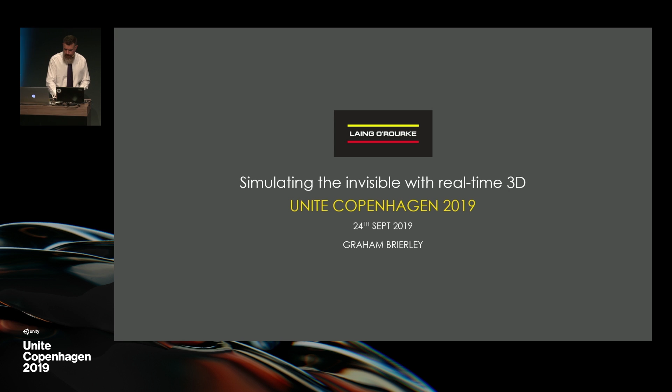This presentation is on how we've created a crane simulator using the Unity platform. I'm going to break this into three chunks - I won't spend too long on the first two, but they're important context: a little bit about the construction industry, how we at Laing O'Rourke are trying to challenge and change that, and then how our digital engineering team created the crane simulator using the Unity product.

It's a fairly well-known statistic that in the region of 90% of construction projects worldwide are either late or over budget. So the good news is there's plenty of opportunity for us to make improvements.

We don't have the best of images within construction, and you put that into the context of a number of the workforce and the experience that they hold leaving the industry, coupled with not being able to attract the same numbers into the industry against the backdrop of a changing environment.

We're going through a digital revolution. So not only do we not have a strong enough supply of the skills we require, we are fast learning that we need to introduce new skills. You'll hear people from within the sector talking about data analytics, developers, programmers, and data scientists that we are looking to introduce to the industry in order to help us with respect to productivity.

There are many reports dating back as early as the mid-90s from Latham and Egan around where construction could make some vast improvements. More recently, the Mark Farmer review, with the slightly drastic title of Modernise or Die, points out some of these key areas of opportunity.

So we have low productivity rates, a great deal of fragmentation over the design and supply chain, low margins, high risk, and quite frankly, a lack of collaboration and improvement as a whole.

I've spoken about the poor industry. You put all of this together, and it's quite an interesting, challenging time for us. And it's nothing that we don't know either - these are well-documented and well-known facts. The question we ask ourselves is then, what are we prepared to do about it?

At Laing O'Rourke, we've been investing quite heavily around how we might just challenge and change both ourselves and the projects within which we work.

There's a quick note from our chief executive and owner. We work for one individual, Ray O'Rourke. We are the largest privately owned construction company within the UK. It's about 3 billion turnover, somewhere in the region of about 4,000 employees, and we have our own direct labour force. We have a strong reputation around innovation.

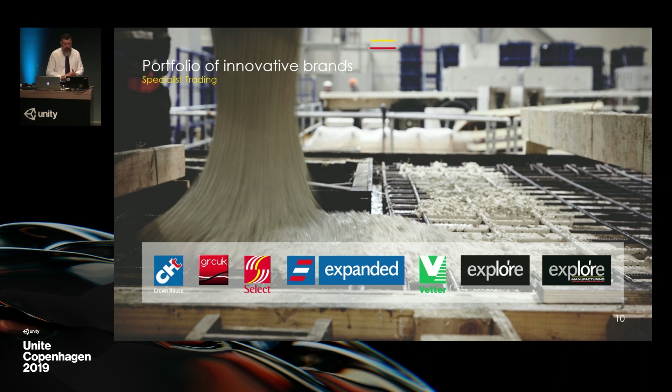So these brands include Crown House Technologies for our MEP installations, Select is our in-house hire - that's all cranes, cabins, lifting equipment - and then to the far right-hand side, Explore Manufacturing. I'm going to spend a moment there because that's quite key to our design for manufacturing assembly approach.

Out of this factory - this was a £100 million investment that came from Ray O'Rourke himself, built 10 years ago - largely this has been created around a product set, just across the bottom of the screen there. We are looking to create that kit of parts, influence the design, and then use those in the way that we go to work and construct our projects.

I've got a 2-minute video here just to give you an insight into that very facility.

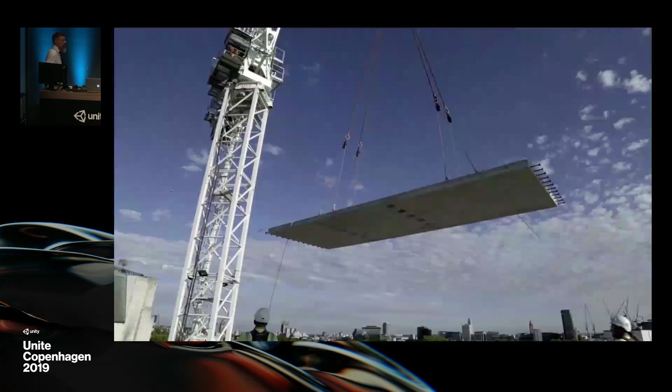Hopefully you'll get a sense from that video there of the investment that our owner's prepared to put into going to work differently and the scale of that facility.

There's a couple of slides here I'm going to use just to help me articulate a little bit about some of the key enablers, and then we'll move on to the consequences of this kind of change of approach.

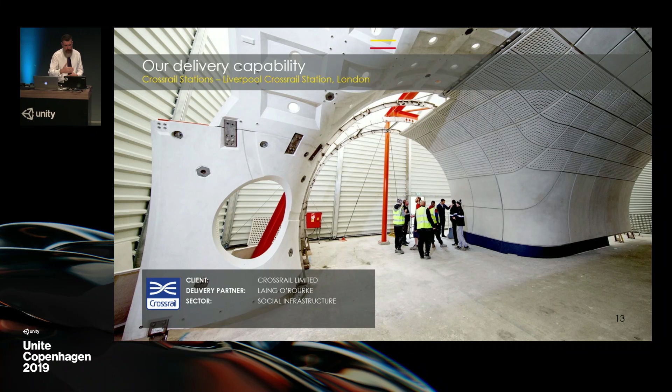So these are all from a manufacturing approach, right? All the gains in quality you get by working in a factory environment, you want to make sure that when you get these to site, they fit. So the last thing we want to be doing is unpicking all of our hard work. And that's true of those larger components that are supporting the slightly smaller platform finishes there.

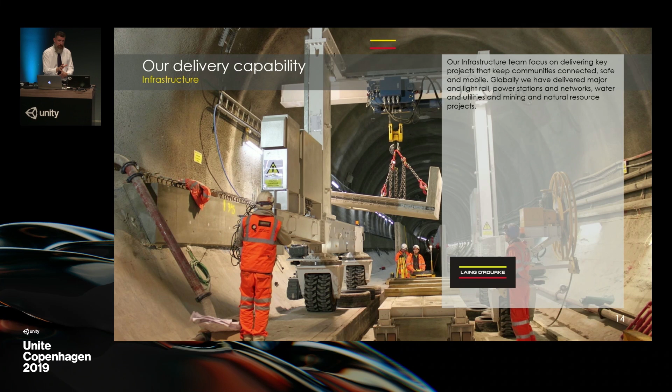Again, this is Crossrail, and you'll see here, and it's repeated in the video shortly, the component set that we then take into the structure that will support those platforms. So as users of such a rail system, we won't see this, but there's the large tunnel, and you can see there the small team of operatives putting into place the structure that will hold the platforms.

And rather than installing these bits of steelwork piecemeal and doing various follow-on trades, what we're doing is we have got these manufactured, sprayed, and then they are transported to site. And then everything then starts to come down to hook time in the lift. And so we do as few tasks on site as we can by moving the work and therefore increasing the quality by taking things into a more controlled factory environment.

I just want to point out two things. So the key enablers are being able to influence the design early, because you're now taking a product-led design approach and spending a specific amount of time on the detailed design such that the geometric fit is what we expect when we get to site, and that we're not unpicking the hard work that's gone into the manufacturing side of things. The consequence of working this way is that we now spend a lot more time focusing on the methodology. So not only have we got to be able to get these components into place in their finished state, but we have to be able to navigate these around a changing construction environment.

And this puts an awful lot more thought process and critical path, if you like, on the lifting and the manoeuvring of these products. So there's a short clip here, and I'll just ask you to consider some of the movement of these component parts.

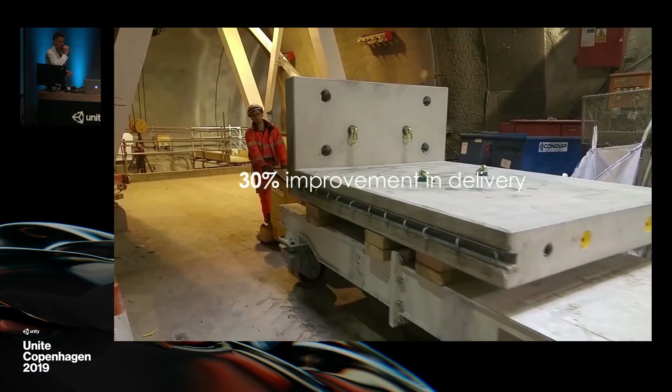So as you can see, a far greater focus on the movement of those component parts, and hopefully you've got a sense of scale as to how some of those look.

So I mentioned I'm the head of digital engineering at Laing O'Rourke, and in a way, in order to try and increase some productivity around our projects, we look to digitally prototype as much of our projects as we possibly can prior to building them in reality. And we do this through a number of ways.

The team that I lead is focused predominantly across three areas. So we spend a considerable amount of time trying to secure work, and we focus on de-risking and understanding the complexities of the projects at this point. So we'll do some work around visualization, methodology, and quantification.

Once we secure a project and we go into delivery, we have a team that focus on something called Level 2 BIM, which you may or may not be familiar with, and some of the other presentations have spoken about BIM, Building Information Modelling. This is responding to government and/or client requirements, setting up an environment on a project whereby we can collaboratively work in a 3D environment with our design and supply chain, and look to utilize some of these models for other use cases.

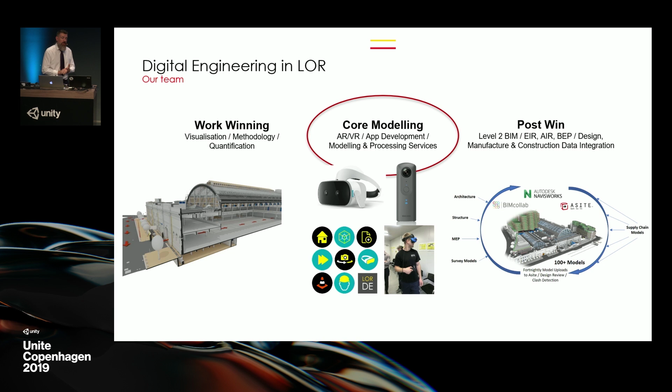We have a team that kind of sits between the two, a central modelling team, and I'm going to focus on this team because this is where we get to the crux of the presentation. We have used various different bits of software for a number of different applications over the years. I'm going to focus on augmented virtual reality and the use of Unity.

It's probably worth pointing out that around about 2008, we got our first bit of antiquated kit that looked like a small keyboard and a camera held together with gaffer tape, but it sort of worked for us. You'll see prior to 2015, there's a smaller number of use cases, many of which were less successful than others, and I've got no issues with that. I'm quite happy to fail fast as long as we continue to learn about what it is that we're trying to achieve and where the application might be.

Against that timeline, I'm going to focus upon the crane simulator and how that's been taken into our lifting academy.

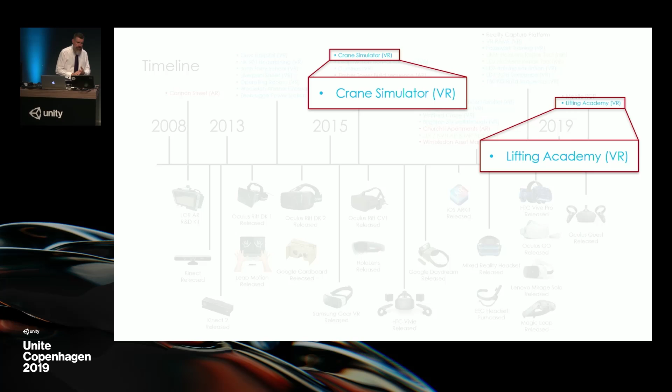There's a key point I want to raise here, and it comes back to that skills report I mentioned at the start. We added Derek and Grant to our team post-2015. They took a bit of a gamble on us as developers, not familiar with the construction industry, and I certainly didn't ask permission when recruiting these individuals, but they've been very fundamental and valuable team members since, bringing a skill set we were otherwise struggling with.

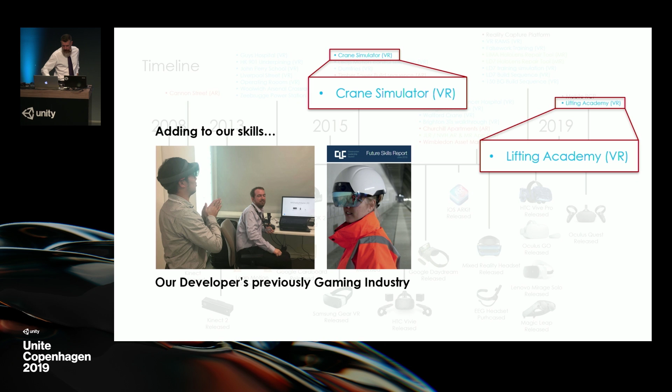As engineers and technicians, certainly my generation, we don't necessarily have a developing, coding and data background built into us. It just wasn't part of our training. I think the guys here are praying to the modelling gods that Reflect will stop them spending all their time optimising models. They assure me that's 60% of their time, so I'm looking forward to some productivity gains myself when that software becomes available.

What's key with any kind of application is that you understand the scope. The scope here is that we have a crane operator working in isolation. We'll have another member of the lifting team, usually out of sight, hooking a load, and then someone else on the project somewhere, perhaps in sight, perhaps not, unhooking the load, ready to put that into position. This team can look different from one project to another, so bear in mind those components I showed you in the videos earlier.

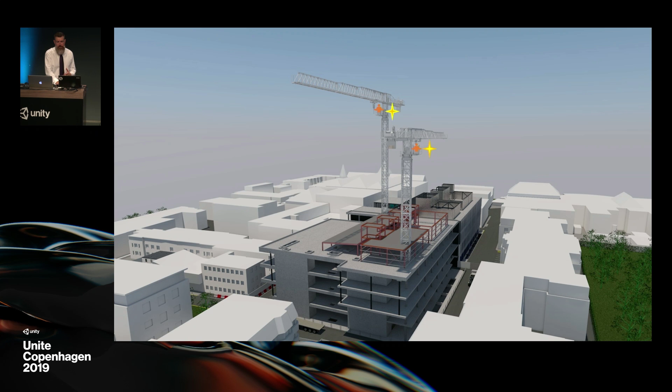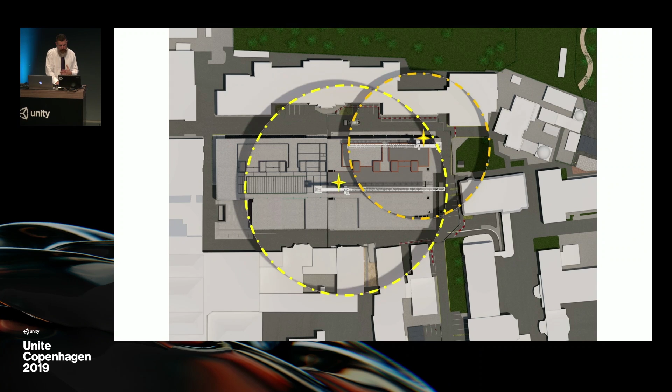If we put that into context of a project, you'll quite often find there's more than one crane at a time, and the communication between these drivers is fundamentally key, as shown by the fact that in plan here, they will oversail. In addition to communicating with each other and doing concurrent activities, this is how that lifting team might look on a project.

Down at ground level there, you'll see the back of the wagon, and we'll have an individual from the lifting team hooking the component, not necessarily being able to see the individual who's going to be in receipt of that component.

It's not always that the individual in receipt of the component will be in the field of vision of the crane operator. On one or two of those videos earlier, you saw us dropping some large components through a mole hole, so the methodology would have allowed for us to drop those components. The communication is all verbal, and it's fundamental that this team understand the constraints and perspectives from each other so that this is done safely.

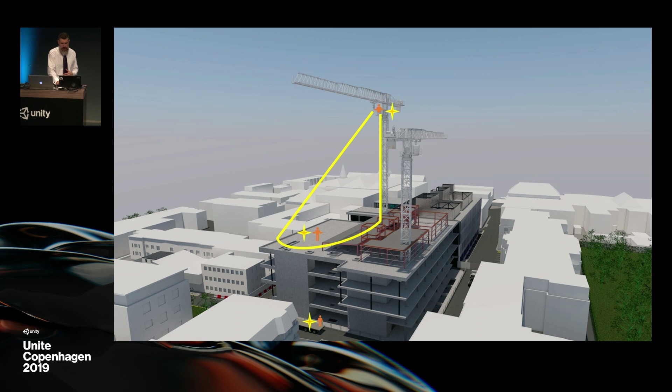The higher those floors are, the greater that distance and the harder it's going to be to see. You certainly can't see beyond the edge of that slab in order to see where the lift was being hooked in the first place. So fundamentally, we're talking about blind lifts here, and the communication is so important.

You might also notice this is a relatively quiet and clean-looking site. That's another one of the advantages from a design for manufacturing and assembly approach - we managed to reduce the number of workforce on site by focusing on these key operations.

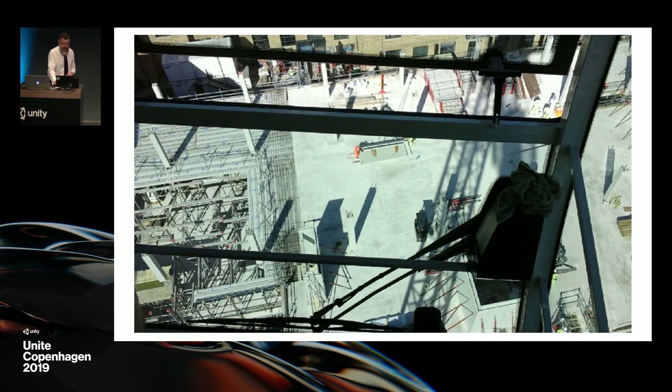If we go back to the context of the team, the crane simulator started with some development around the crane operative's perspective first. There's a short video here where Grant, one of our team members, is going to do a bit of narration around how this came to begin.

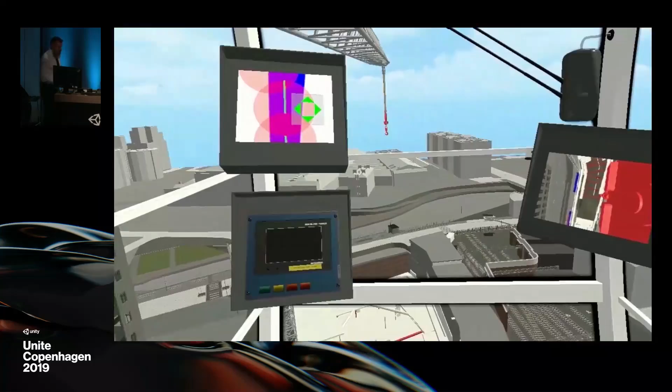I'm not from a construction background, I'm a programmer. I've come from a completely different background, and I was brought into the company to develop applications like the one for the Google headquarters. We've made a crane simulator, inspection modules for health and safety, training applications, that sort of thing - it's to immerse people in the environment before they go there, really.

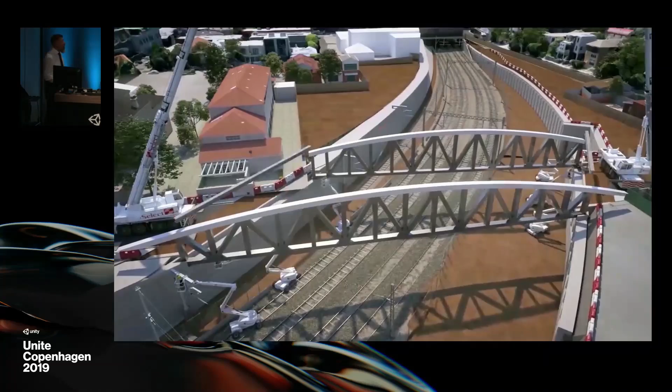Gaming has come a long way in recent years, and it pushes VR and AR technologies forward. We use headsets used with gamers, and a gaming engine called Unity to develop platforms to run the VR applications. With training and simulators, a lot of people are using VR because they're immersed in that environment, they can't be distracted, and it's a lot better tool to use than just a tablet or a PC.

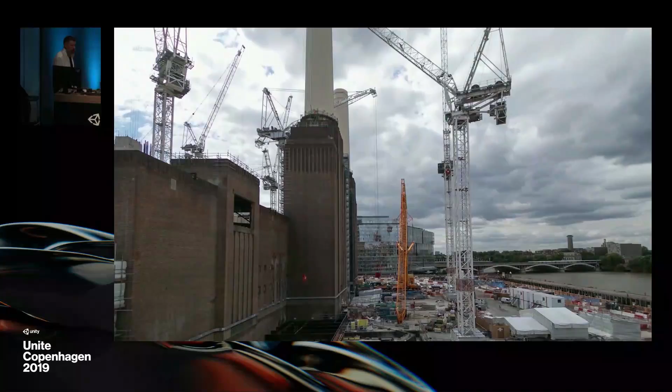Recently, I saw a video online of someone in a completely different country controlling a crane with VR controllers, and that's where I'd like to be heading, where people don't have to go up a 100-foot crane. They can just sit in the office, use the controllers, in a safe environment. If anything should happen to the driver, they're all the way up there. Instead they'll be in the office in a better environment.

I'm not sure if you noticed, but towards the end there, that was an extract from a project we secured - the new Google headquarters, in central London, adjacent to King's Cross and St Pancras Station. Key to us understanding our own risks, and conveying to the client that we were the right people to appoint, was being able to take our design for manufacturing assembly approach and lift those components safely whilst operating next to a live railway, which was quite a key requirement.

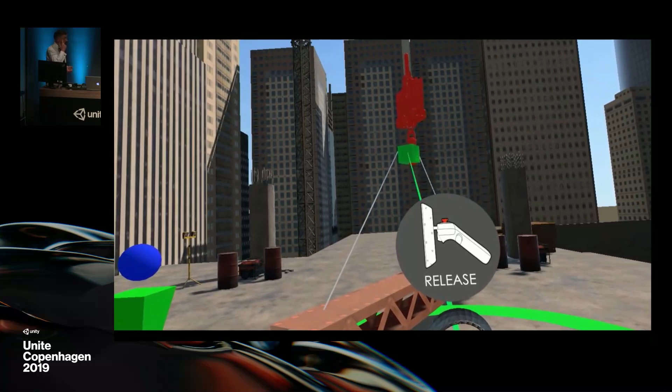That will give you an indication as to how that functionality was starting to build in for the rest of the lifting team.

More recently this has all come together and formed part of the key training material we've built a training academy around. I'll make no apologies for the fact that this is very much function over visualization. We're trying to make sure we're building in the right level of functionality, hold points, questions and test points within the software, to make sure we're getting the right feedback from our lifting teams and they're focusing on the training points we'd like them to.

Some of the key points from this is that the environment is fairly well simulated, and it's really improved communication across the lifting teams themselves, and lifting teams across other projects. Put that into context with some of the stuff I shared earlier around the experience and skills leaving the industry - that's a really usable knowledge base for us to help build upon and make sure we've got the right workforce to take the approach we're looking to take.

There's a short video here whereby you'll hear from some of the operatives who have used the training material themselves. There's a little bit of a corporate induction, but for me, the success of this has been the feedback from the operatives themselves that comes a little later in this video.

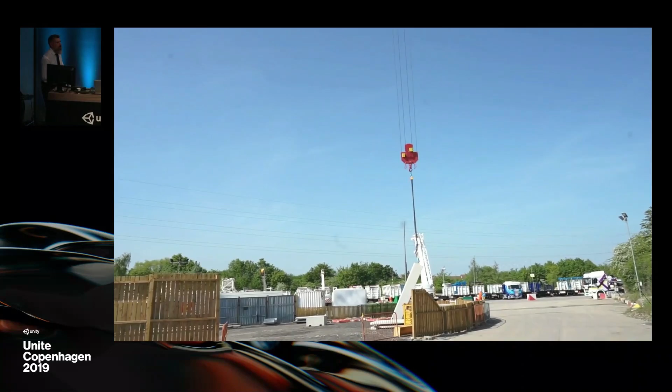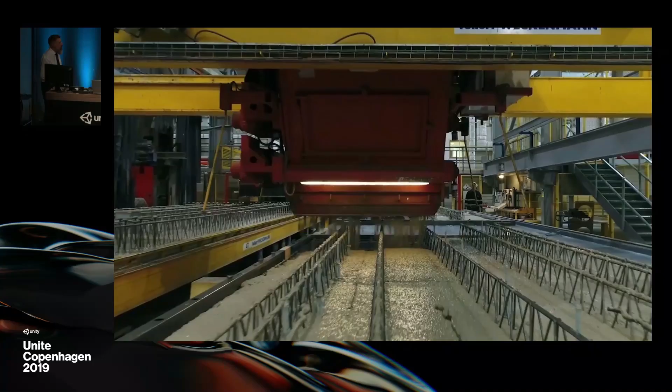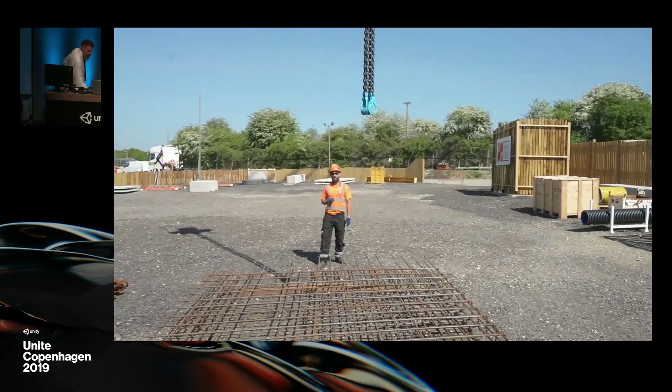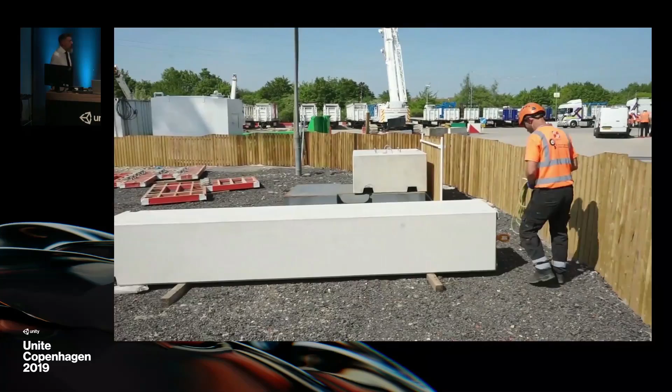Laing O'Rourke is committed to ensuring its workforce is equipped with the necessary skills to deliver exceptional industry service, reflecting the sector-wide momentum behind DFMA and off-site manufacturing, with an emphasis on larger and heavier lifts. Currently, the demand for highly skilled advanced slingers around the country exceeds supply due to an increased reliance on lifting operations. This is leading to poor productivity and a lack of technical competency and safety within our industry. Delivered by certified trainers at our dedicated training centre, the two-day course is designed to equip our slingers with both enhanced practical and theoretical knowledge to deal with more complex products and lifting operations within busy construction sites.

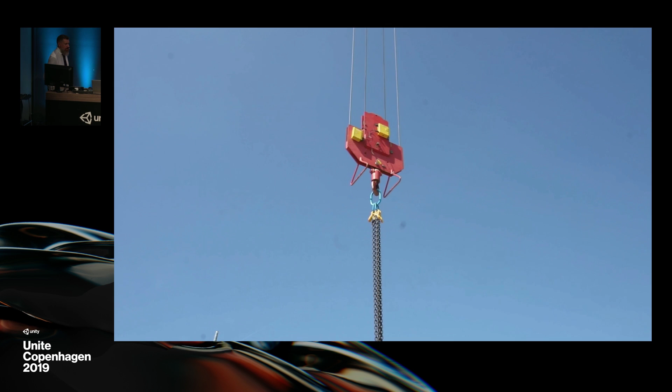Well, 1977 started banking a crane. There was no courses or tests in those days - everything was got through experience. I've been slinging for about 25 years now, and as a slinger you think you know pretty much everything after 20, well even after 10 years I'd say. But this course is industry changing. It's fantastic. I have learned a bit, to be quite honest with you, which I didn't think I would, but I have.

So I think for me, the feedback there from the operatives is fundamental. If we can continue with the various different developments and ensure we get that level of engagement and connectivity and feedback from the operatives, then we're doing something right.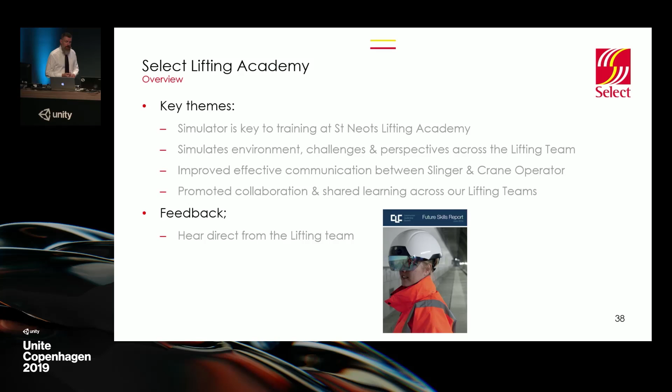Just to summarise, I thought it was important to share a little bit of industry context for you, the opportunity for us, and the opportunity that might exist for a number of you in the room, if you're not already in the AE space, to seek out perhaps a different opportunity that you might previously not have been aware of.

How we at Laing O'Rourke are trying to challenge and change some of those industry norms, and where the team that I'm lucky enough to have support me have developed the crane simulator using the Unity platform.

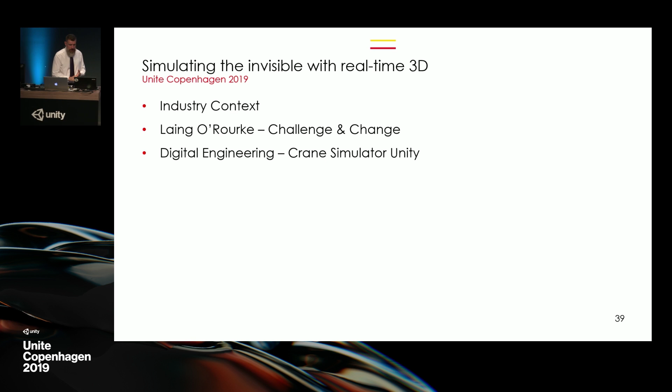There's one or two other areas where we're now starting to take this, and we're getting a bit more traction around it, so this is really quite a pivotal period for us, and I'll just briefly show you those.

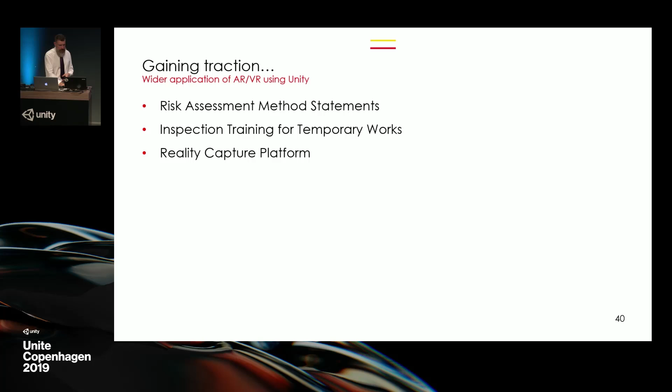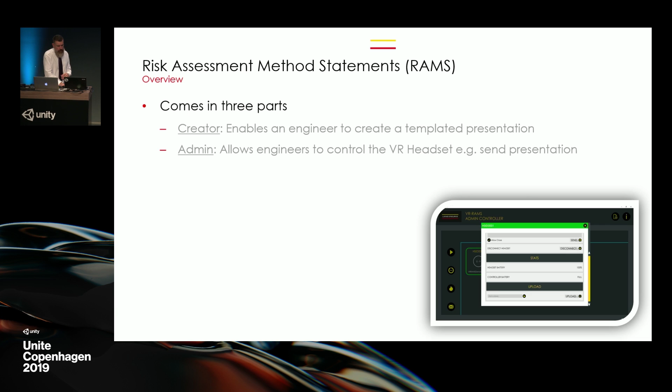So there's risk assessment method statements, and we're using the platform predominantly in three parts here, whereby we create a creator, which gives us a bit of a framework from which other people can use this app and make their method statements. Typically this would be something a project engineer would take hold of and create on a project. Then there's various controls we're introducing so we can guide the workforce around what it is we want them to look at. We have quite a diverse workforce, so various different languages we're looking to bring into this.

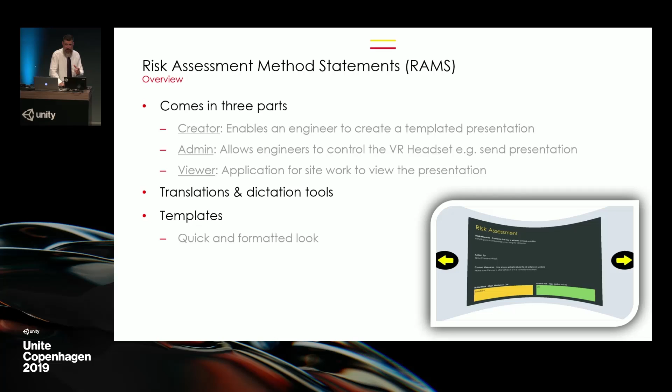There is also the inspection and training of temporary works. This is something that's actually up for an industry award at the moment in the UK, so we're waiting to hear on that.

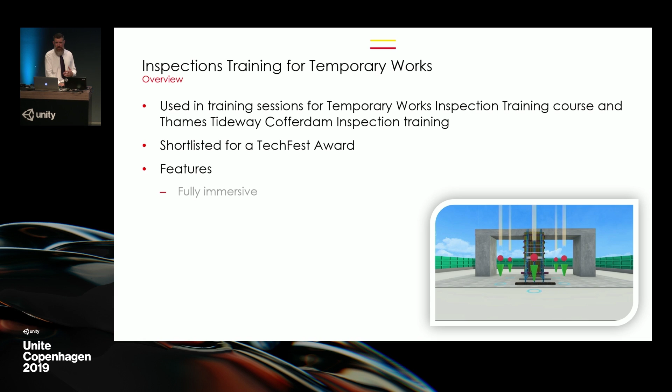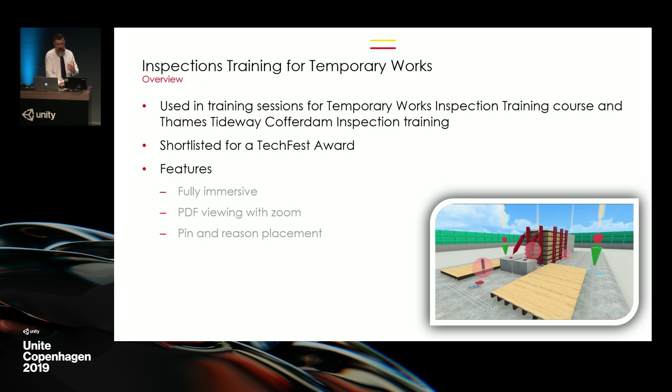Some of the features we're building here are, again, an immersive environment. We drop some two-dimensional drawings in, which we would more typically use within a method statement or a training module for our engineers and workforce, and then we can start to put in pin and reason placements to test learning and understanding, as well as some key annotation and the ability to mark someone's success through the tool.

Then something else we developed more as proof of concept. The presentation before spoke about construction documentation, and contractually and historically that's largely around two-dimensional drawings and specification. From my perspective, handing over a set of red line marked up drawings or blueprints isn't a particularly productive piece of work, or is it all that useful? Rarely do I believe that they are utilised.

There are some other products on the market that do something similar, but the guys basically have developed an app whereby we can put our own blueprints, if you like, in a 3D form onto an app and then start to host key progress photographs. We're looking to get some feedback from one or two of our clients as to whether or not this would be a better way of handing over completion documentation to them.